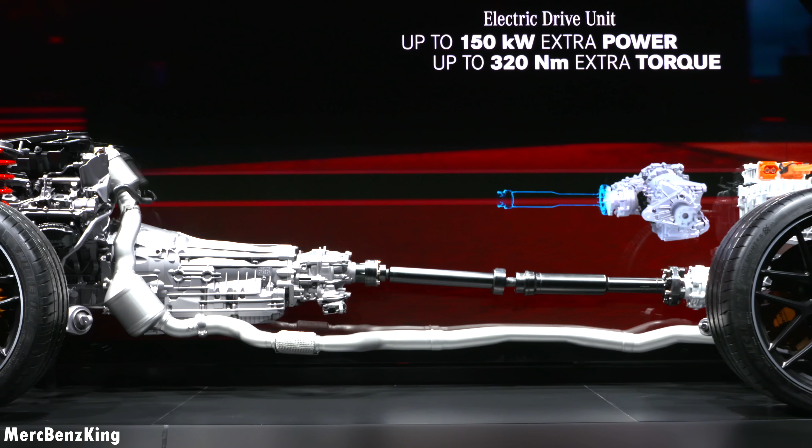Yes, so unlike every other hybrid system having the electric motor between the combustion engine and the transmission, a so-called P2 hybrid, we have put the electric motor at the rear axle. It's a so-called P3 hybrid. We have put the e-motor at the rear in combination with the battery to have a very balanced weight distribution between front and rear axle.

It gives us an instant boost at the rear wheels and vice versa. When we want to recuperate, it's very efficient because we don't have any losses from the combustion engine and the transmission when we recuperate directly into the e-motor and into the battery. But now let's have a look into this specific electric drive unit, how we call it.

The electric drive unit consists of three major components. At the first, we have a permanent synchronous motor. It has up to 150 kilowatts of power and up to 320 newton meters of torque. We also use the very well-known AMG electronically controlled limited slip differential, what you know from other performance cars like the GT 4-door Coupe maybe. And we have combined it all with a 2-speed transmission.

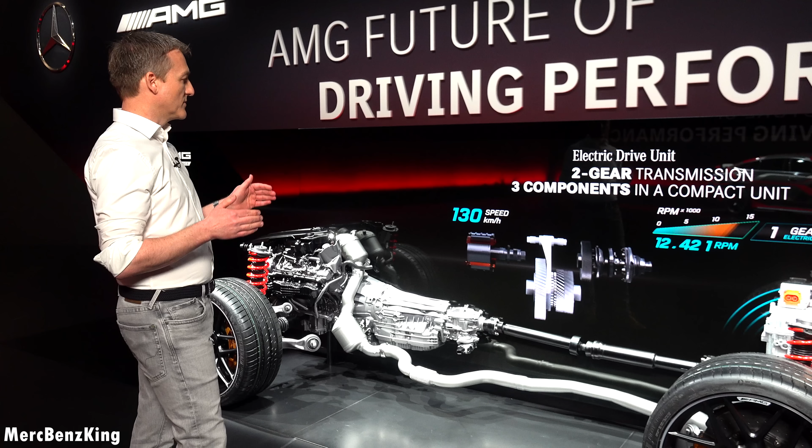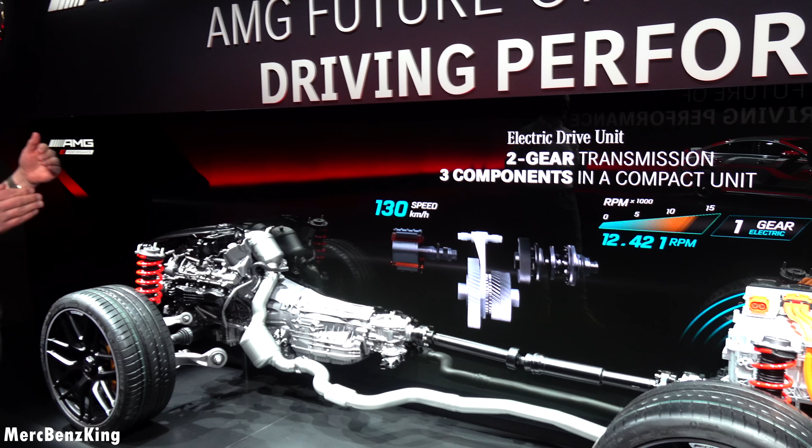So the electric motor can rev up to 13,500 RPM. And having this 2-speed gearbox now, we can support the vehicle in lower vehicle speeds, in first gear up to 140 kph, having a very high boost at the wheels, and then shift into second gear latest at 140 kph. And then we have the boost up to the maximum speed of the vehicle.

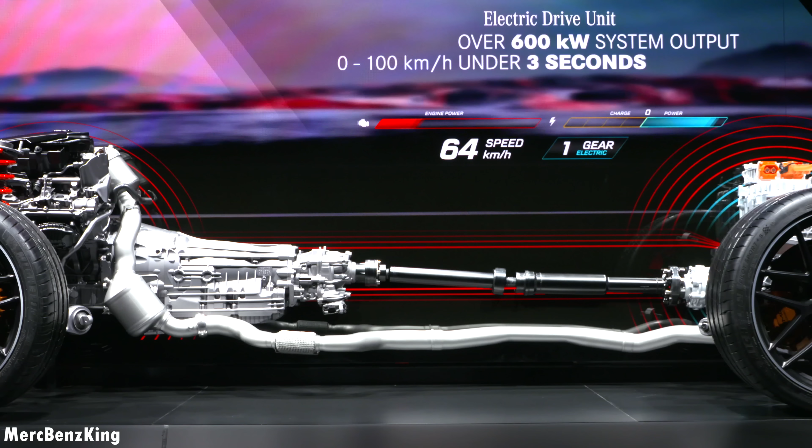By looking at the V8 biturbo and seeing the additional 320 newton meters of torque, what can you say about the torque distribution and how does the 4MATIC work? Yeah, so we combine our electric drive unit with our quite known AMG Performance 4MATIC Plus system. So we have a fully torque variability from front axle to rear axle. And also it's really worth to mention when we have electric drive, when we have slippery conditions at the rear, we can distribute the torque also to the front axle to have four-wheel drive in electric mode.

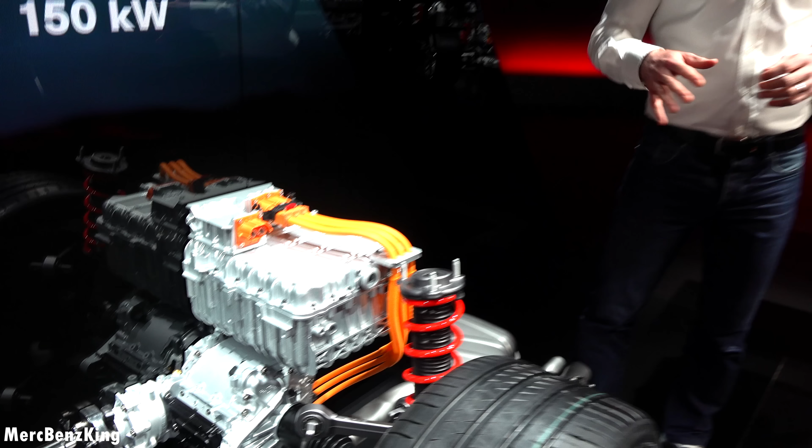That's amazing, but there must be more. What about the battery? Yeah, for our e-performance powertrain, we have also transferred technology from Formula One right to this vehicle. Let's have a look. All right, this is my topic. Hi, I'm Dennis. I'm responsible for the high voltage batteries, and I will show you what's inside of this battery right here.

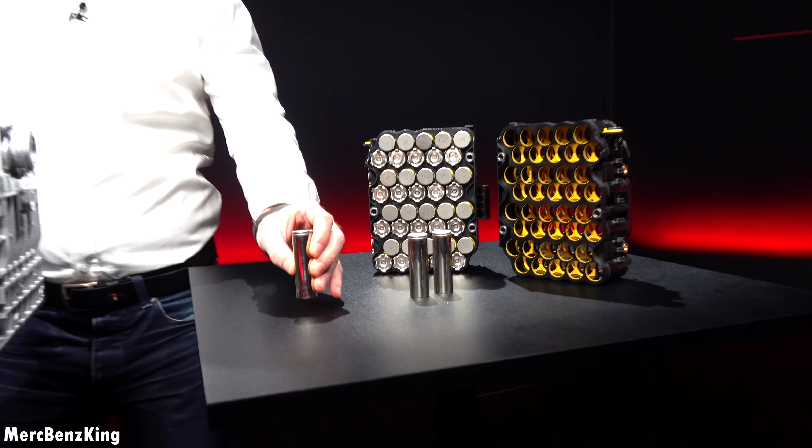So what we have here is our high performance battery, and this is something very unique and special for us because we have a peak power of 150 kilowatts at 89 kilograms. So the topic for us is to have a high power density. And what we get out of the system is, actually, we have these cylindrical cells. So we use 21700 cylindrical cells, and we have a special cooling for these cells. Otherwise, we wouldn't get the performance out of this battery.

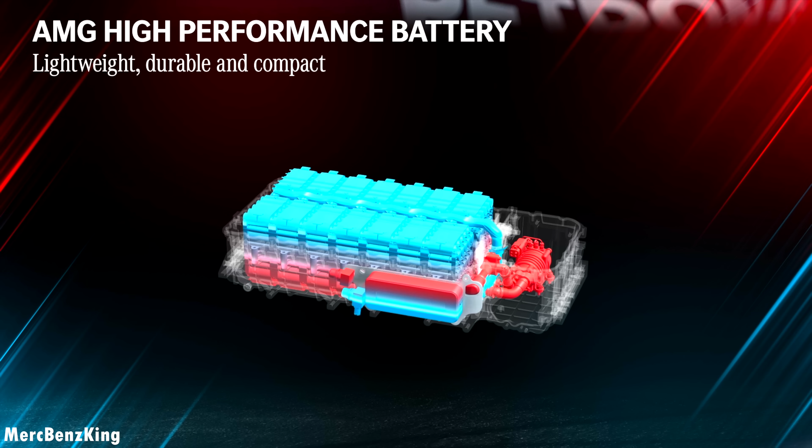The AMG High Performance Battery is an in-house AMG design developed in close cooperation with our Mercedes-AMG Petronas Formula One team colleagues. It combines high power, which can be called up frequently in succession, with low weight to increase the overall performance of the new AMG Performance hybrids. At the same time, the AMG's own battery meets the highest safety standards, as the lithium-ion round cells are embedded in a stable but lightweight aluminum crash structure.

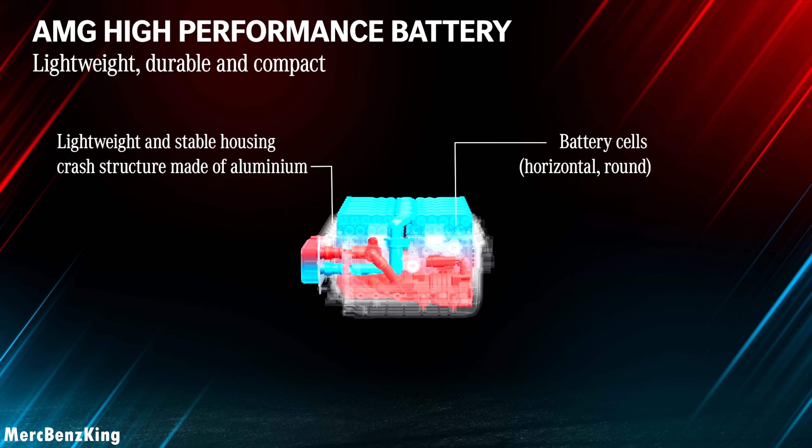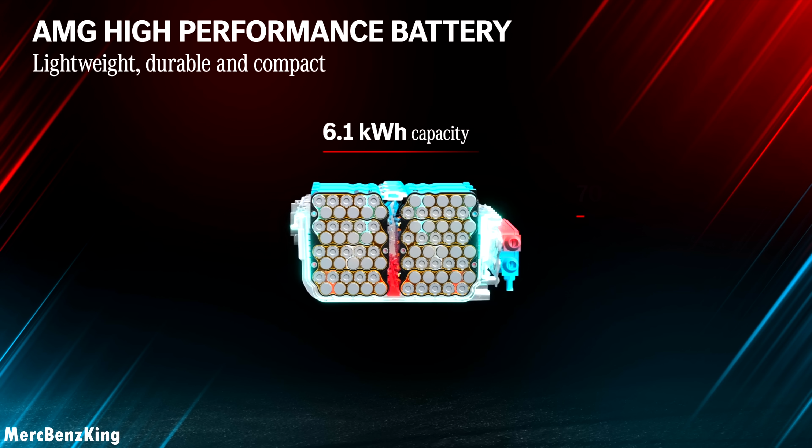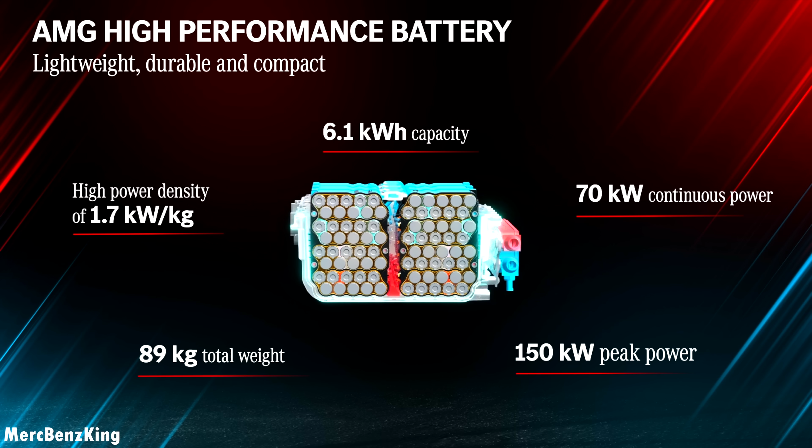The 560 horizontal round cells have a capacity of 6.1 kilowatt-hours and deliver 70 kilowatts continuous power, as well as 150 kilowatts peak power, with a total weight of only 89 kilograms. At 1.7 kilowatts per kilogram, the power density of AMG's own battery is twice as high as that of conventional drive batteries. This allows us to make it more compact and lighter, enabling rapid energy output and ensuring highly efficient recuperation.

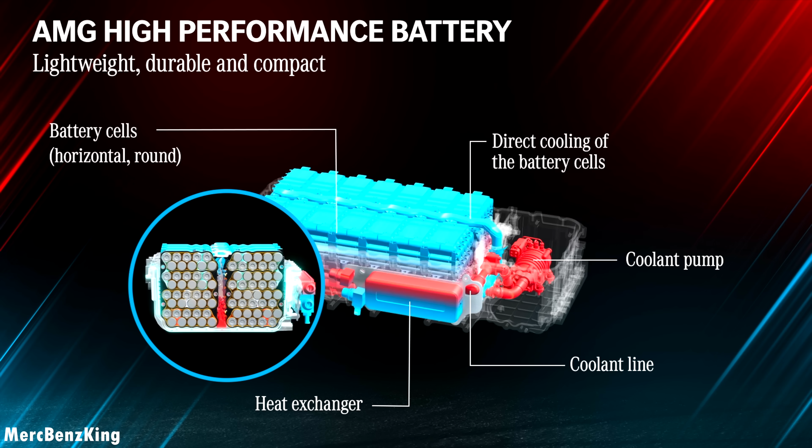The basis for the high performance of the AMG 400-volt battery is the innovative direct cooling. For the first time, each cell is cooled individually via a coolant pump and is permanently surrounded by a high-tech coolant. A special heat exchanger conducts the heat into the vehicle's cooling system. The innovative direct cooling keeps the battery within an optimum operating temperature of 45 degrees Celsius, no matter how often it is charged or discharged.

So for the E Performance, we have 70 kilowatts of continuous power, and that's all the time. So the system is actually always on in a hybrid mode. What we do is we have a direct cooling system, and this is coming straight from the Formula One technology. So we have an internal cooling circuit with a non-conductive fluid. So we fill up the complete battery and we can cool down every single cell in the system. These are 560 lithium-ion cells, and we cool that down to 45 degrees.

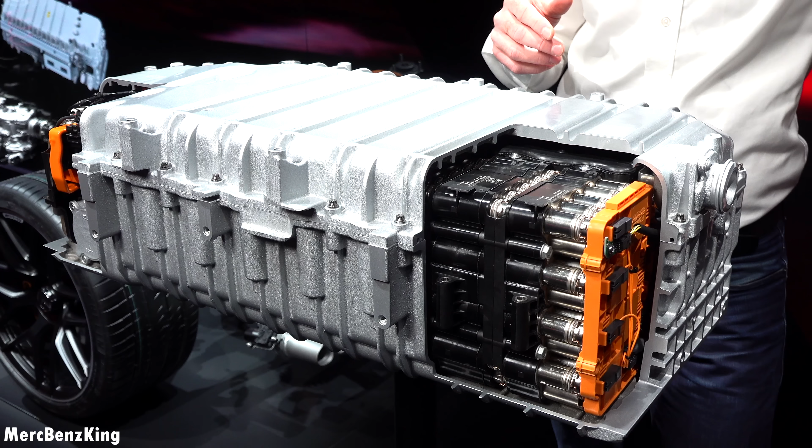And this is the point where it gets interesting, because these 70 kilowatts, as I already mentioned, is for the continuous power of the system. So how many cells are there actually in the battery? What we have is 560 cells in the battery system. So that means the exact same output as in the four-cylinder? So exactly, yes.

Hello, my name is Hannes. I'm responsible for the turbocharger development at AMG. And we now have a view on the new inline four-cylinder M139 in a longitudinal direction. It is more or less the same engine as you know from the 45 models, turned 90 degrees. And we just improved the power output to more than 330 kilowatts in this kind of engine, and introduced the new technology, the electrified turbocharger here.

So Hannes, you told me this is a new kind of turbo. Can you tell me more about it? Yes, of course. So it's now an electrified turbocharger, and the main difference between this kind of turbocharger and the turbocharger of the transversal engine in the 45 models is first that we here use a mono-scroll turbine and not anymore a twin-scroll turbine. That offers us the possibility to get more power out of the engine on one hand, and including the new technology, a 6 kilowatt e-machine directly on the shaft of the turbocharger.

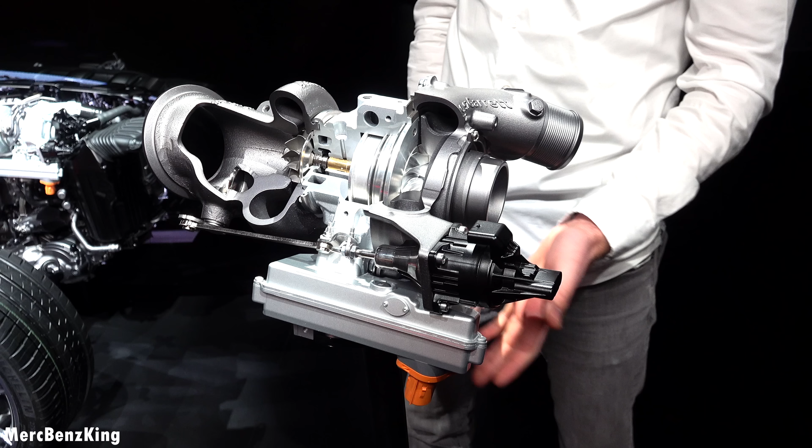And we also implemented it in our E Performance drivetrain, and together with the P3 unit we have a very performant driving situation that is also very efficient, and not only a performance thing that we use here in combination. We have a 48 volt controller on top, and it's directly integrated in the part, so it's only one part that we have to put in the package of the engine at the end. It's a 48 volt system, and with the controller we control the speed and the torque of the e-machine on the turbocharger itself.